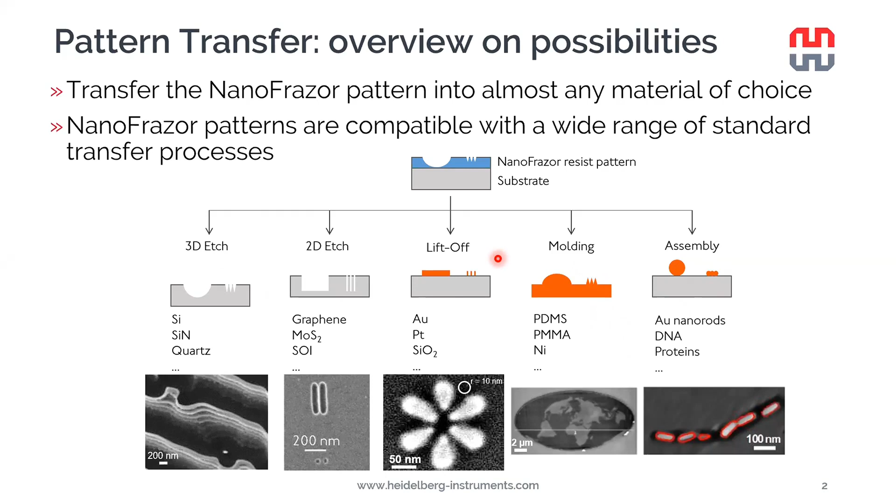Also, it is possible to mold, make replicas out of the resist structures, for example, for nano imprint mastering applications. Also, this will be covered in a separate webinar. Also, it's possible to assemble nanorods, nanowires, and so on by using templates patterned into the resist. But today's topic, as already mentioned, is lift-off, which is maybe the most commonly employed nanofabrication pattern transfer process.

So just looking into Wikipedia, we find the lift-off process definition. Basically you can pattern a photoresist using any lithography technology you desire. The only requirement is that there should be a hole created in the resist where the bottom is exposed to the substrate where you want your final pattern to be, and there should be some resist left elsewhere. And so that when you deposit the metal, most of the metal typically remains on top of the resist, and the parts you want to stay are deposited onto the substrate.

Then when you put your sample into the solvent or chemical, the resist together with the excess metal will be removed during the process, and you will be left with only the structures that you wish to remain, that were deposited in the hole in the resist. The key here is that you have an access point or several access points for the solvent to enter to the interface between the continuous metal film on top and at bottom to actually dissolve the resist.

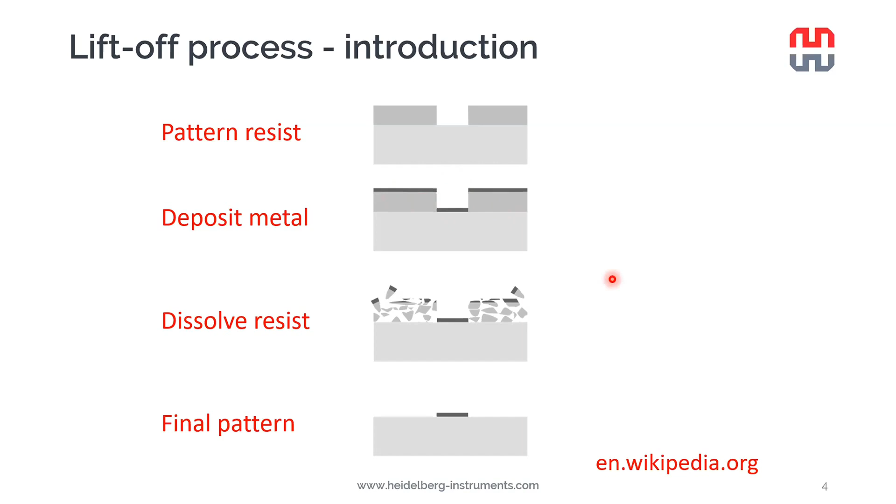Now we have a small problem with the NanoFrazor because we are using these ultra sharp heated tips for removing polymers from the samples, and we would end up, as we can see in this illustration, with sloped sidewalls. And if we would deposit metal everywhere on the sample, we would have a continuous film of metal, and the solvent could not remove the PPA from underneath. We would be just left with the original structure like that in the final sample.

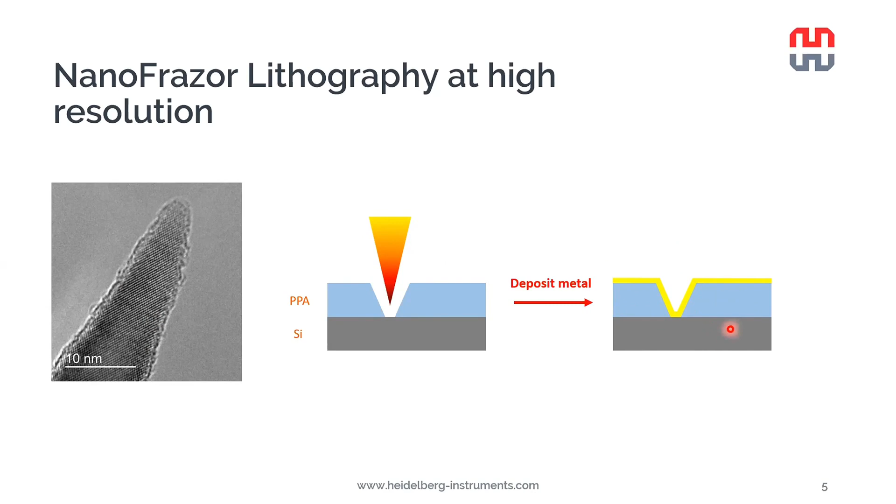Now, to overcome this problem, we introduced an additional resist layer underneath the PPA. It's called the lift-off resist, or LOR for short, on top of which then we deposit the PPA, typically around 30 nanometers in thickness. However, there are exceptions to this. Then after patterning our desired geometry in the PPA, we carry out a wet etching step, which is typically a base, typical developer, or a solvent that is isotropically developing the lift-off resist underneath the patterned holes.

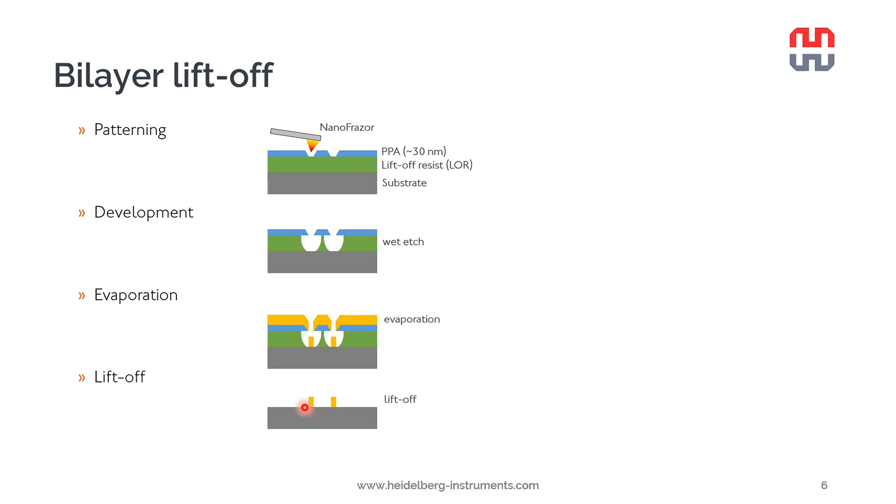So we have a nice undercut developing in the lift-off resist, which then helps us to get this discontinuous film after the evaporation. As you can see here, the metal on top and at the bottom are not connected. And when we put the sample in a solvent, the lift-off resist, PPA, and the excess metal are removed, and we are only left with the metal where we want it to be.

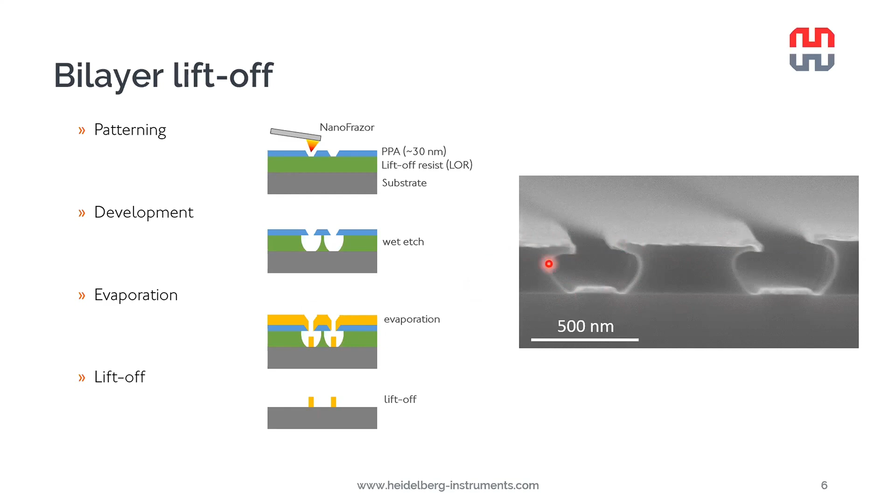In this SEM image, we see a cross-section of a bilayer lift-off sample just after the evaporation of the metal, and here we can indeed see that the metal is discontinuous between the bottom and top of the resist. We also see the freestanding PPA film and a nice undercut that has been formed in the lift-off resist. Now, this kind of bilayer lift-off process can be applied to virtually any patterns you wish to transfer on your sample. It's particularly useful, for example, for creating ohmic contacts to 2D materials, talking about electrodes or straight electrodes, for example.

What was done in this paper from Zheng last year was they used a layer of 200 nanometers of PMGI. PMGI is our typical lift-off resist of choice, coated with 20 nanometers of PPA, and underneath one layer of MoS2 grown by chemical vapor deposition.

After that, the sample was imaged using the NanoFrazor tip, and the flakes were still very nicely visible through the entire stack of resists. And they could carry out a nice overlay of electrodes, and they removed the resist at desired locations. And the PMGI was developed with a diluted TMAH at 1 nanometer per second develop rate. Low develop rate is important so that we can control the undercut accurately.

It's worth mentioning that during this process, the tip apex temperature is reaching only about 120 degrees Celsius, which is enough to decompose the PPA. And we estimate the temperature rise at the sample surface to be well below 10 degrees Celsius. So it's a very gentle process for sample fabrication.

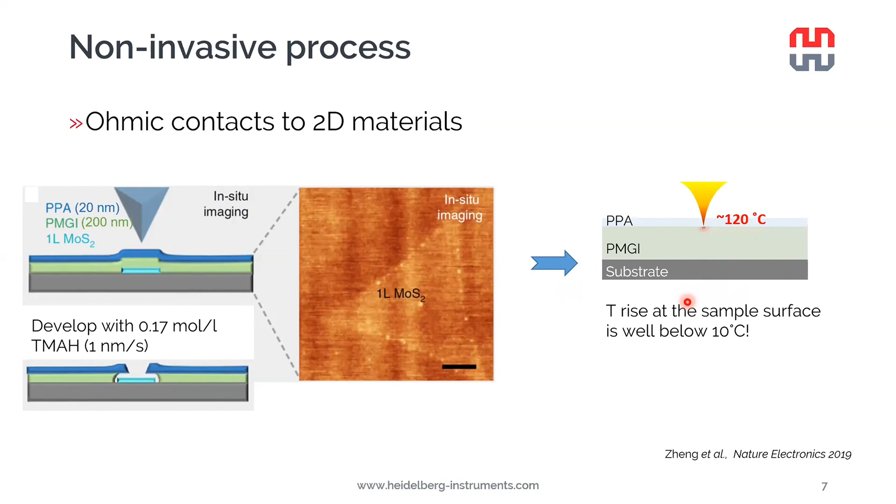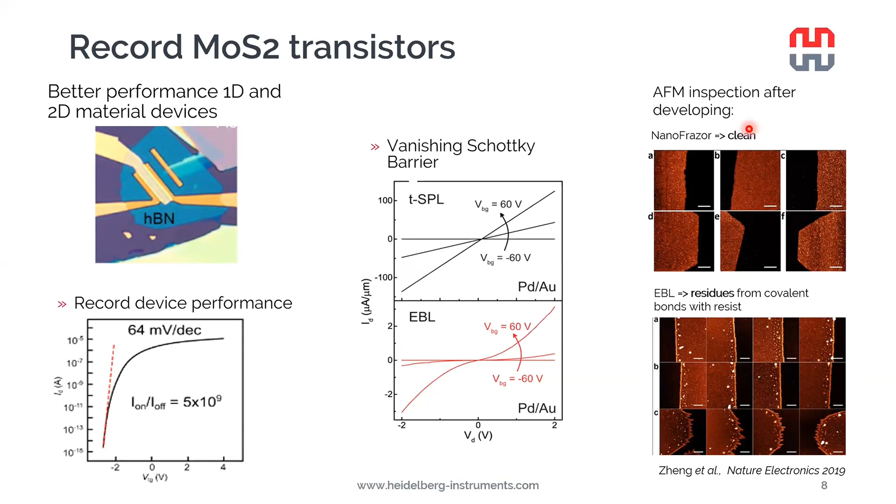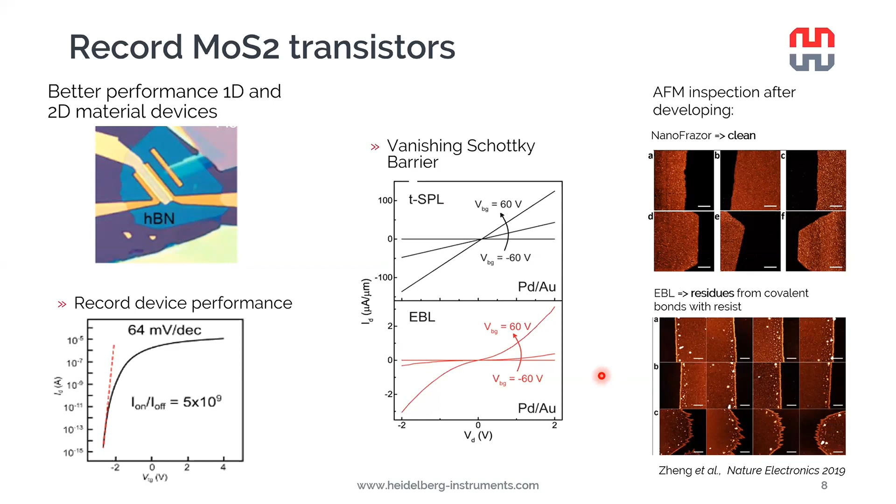One possible explanation why the devices perform so nicely could be that when we carry out AFM inspection of the MoS2 just after developing, so just before the metal deposition, the NanoFrazor samples are pristinely clean, so we don't see any modification of the material, while for the electron beam lithography patterned sample, we see residues from the electron beam resist. It has, as we say, burned on the sample. We also see roughening of edges, which is quite clear damage, which we attribute to the electron beam lithography process.

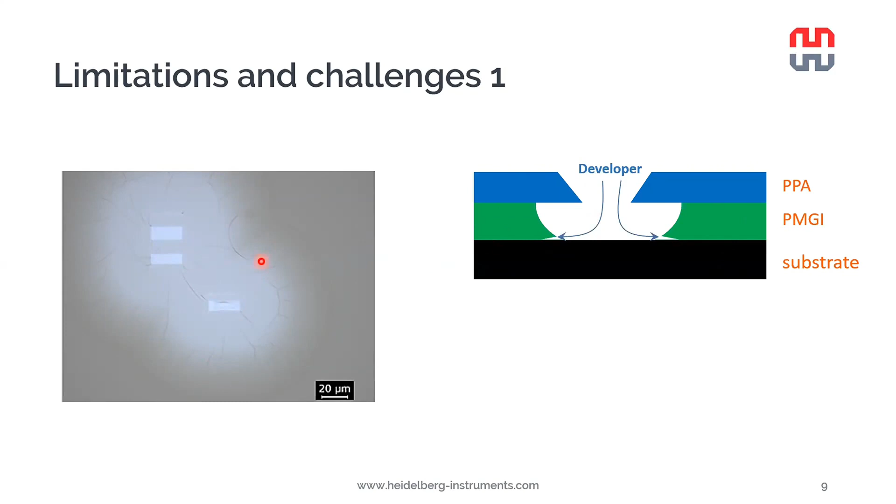So what can be the limitations and challenges when we carry out a bilayer lift-off? First of all, when we were starting to develop this process, we quite often observed this kind of halo image around our structures. Here we want to transfer these bright squares into the metal. What this turned out to be is that the developer is water-based, while PMGI is a quite strongly hydrophobic material, and the substrate was untreated silicon, so the native oxide was hydrophilic. And as a matter of fact, the developer wanted to penetrate between the PMGI and the substrate and push away to lift off the resist material. This is what we can see here.

The solution to this is quite simple. You just have to make the substrate hydrophobic to start with by treating it with HMDS before you spin coat the PMGI layer.

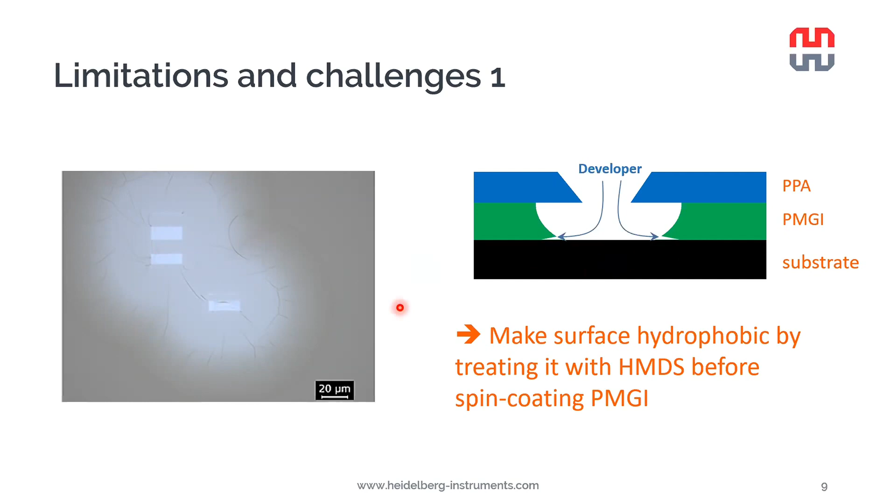The other limitation is that the maximum deposited metal thickness, we found experimentally, to be about 40% of the lift-off resist thickness. This is due to the fact that the metal tends to slowly creep from over the edges of the PPA towards the bottom. It ends up encapsulating the entire patterns, and the solvent cannot anymore enter to remove the lift-off resist.

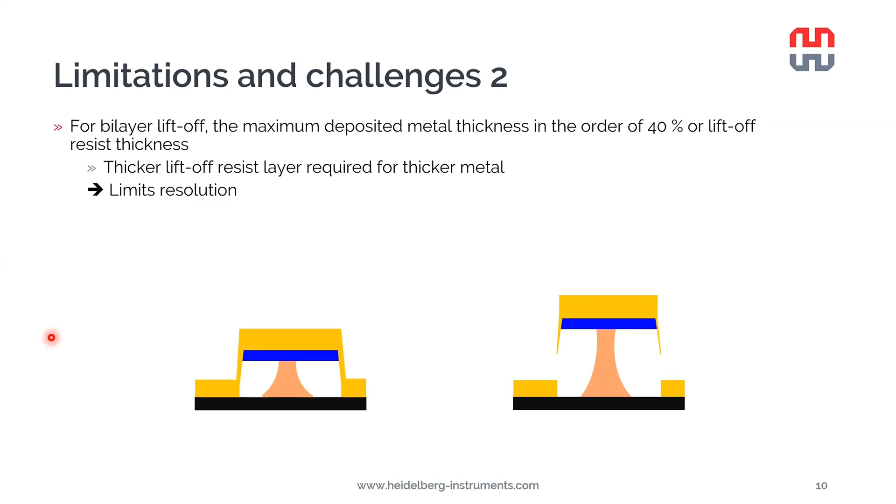The solution is again simple: just use a thicker lift-off resist layer, and we can continue with thicker metal. But actually, as it turns out, this approach of making the LOR thicker limits the resolution as well, as I explain on the next slide. This is due to the fact that the isotropic development is actually determining the minimum distance between the openings in the PPA, and this is approximately 2 times the thickness of the LOR layer. It's explained best by this simple animation here.

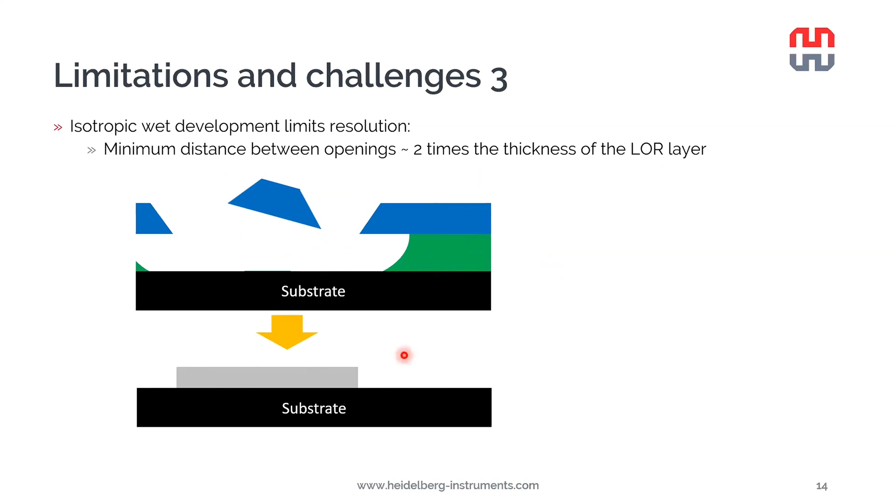As you can see, as we bring the openings in the PPA closer to each other, eventually the undercuts reach each other, and the PPA on top becomes freestanding, and it will fly away in the developer. And we end up having just a continuous field of metal instead of our line and space pattern.

We pushed this technique a little bit, and we managed to pattern a 70 nanometer resolution line and space array by using 35 nanometers of PMGI, 20 nanometers of PPA and a 16 nanometer metal layer thickness. It might be possible to push it a little bit more, making the PMGI a little bit thinner still, but the metal then would not be very conductive anymore. And actually, we have another process for high resolution lift-off, which I will explain in a moment.

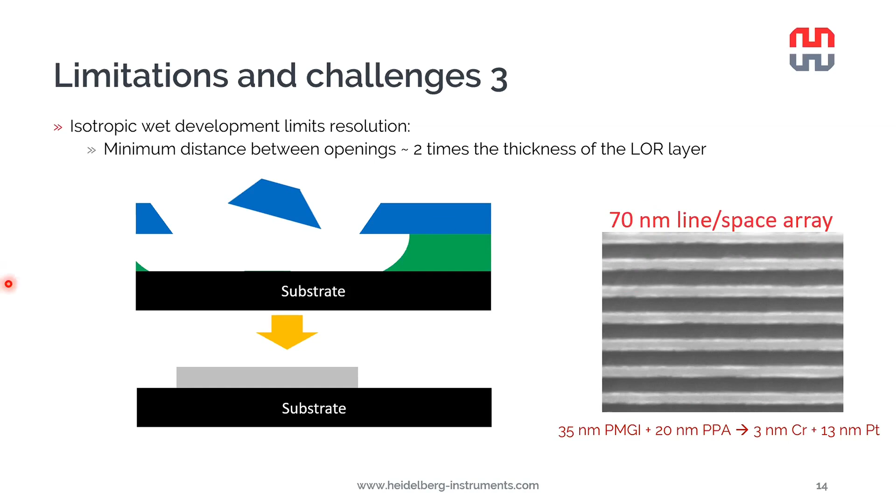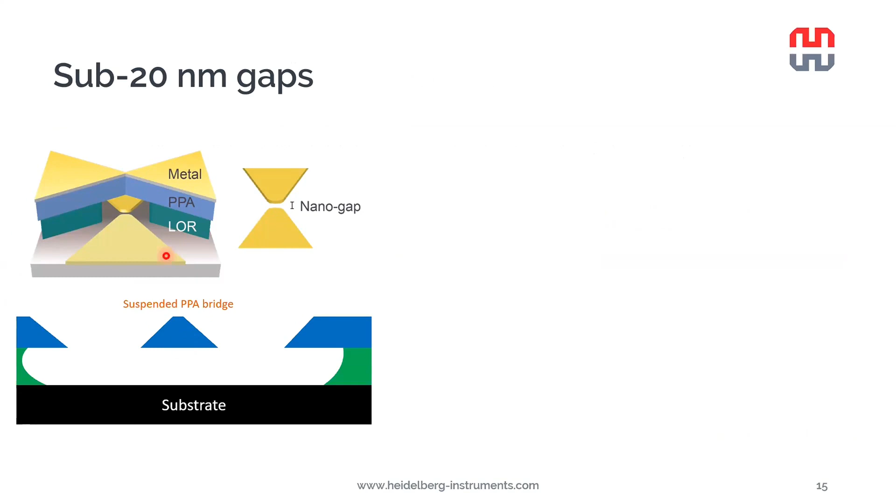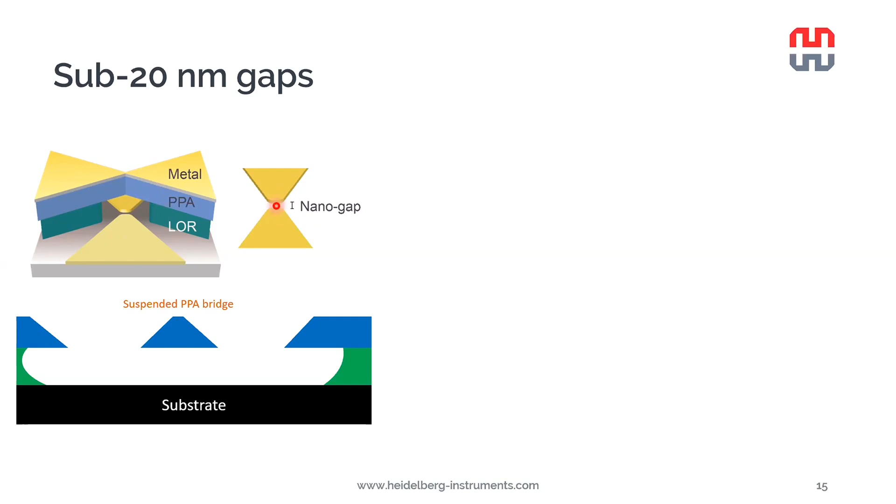But actually, such freestanding bridges can also be taken advantage of for certain device architectures. Namely, the suspended PPA bridge, if it's made short enough, can support its own weight, and it can be used as a shadow mask for evaporation, as explained here. Here the PPA bridge is supported by the LOR islands on both sides. The undercut has completely removed the LOR in the middle, and what we are left with is this kind of a nano gap structure, which is defined by the PPA bridge.

Using this approach, we have managed to pattern less than 20 nanometer nano gaps between metal electrodes. Very useful structures for, for example, plasmonics devices.

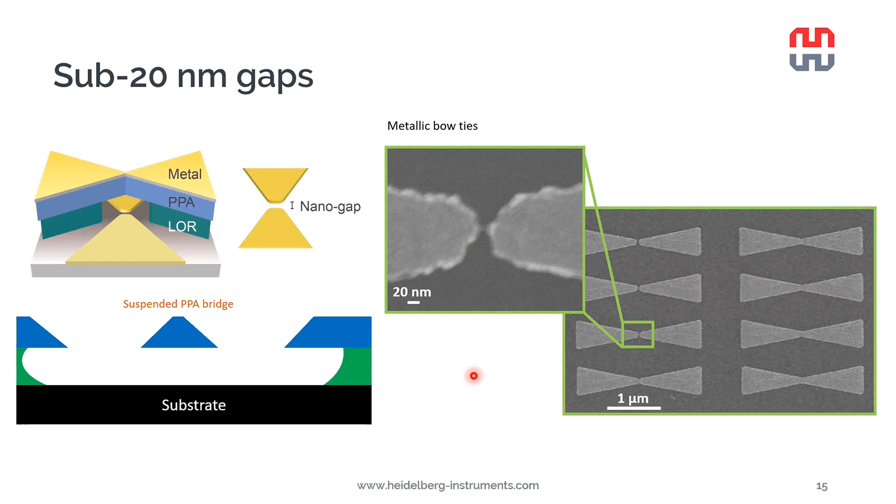And another process that takes advantage of freestanding bridges is the so-called Dolan bridge process that is very widely employed in fabrication of Josephson junctions for quantum computing applications, for example. Here we again start by defining a freestanding bridge. And the trick here is that we carry out evaporation with an angle. So we apply a tilt into the substrate during the evaporation of metal, and in this way we can evaporate metal underneath the suspended bridge.

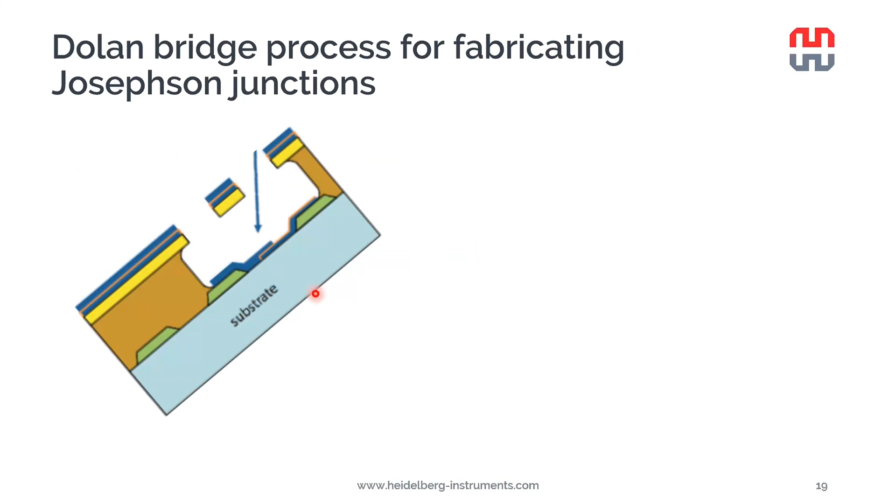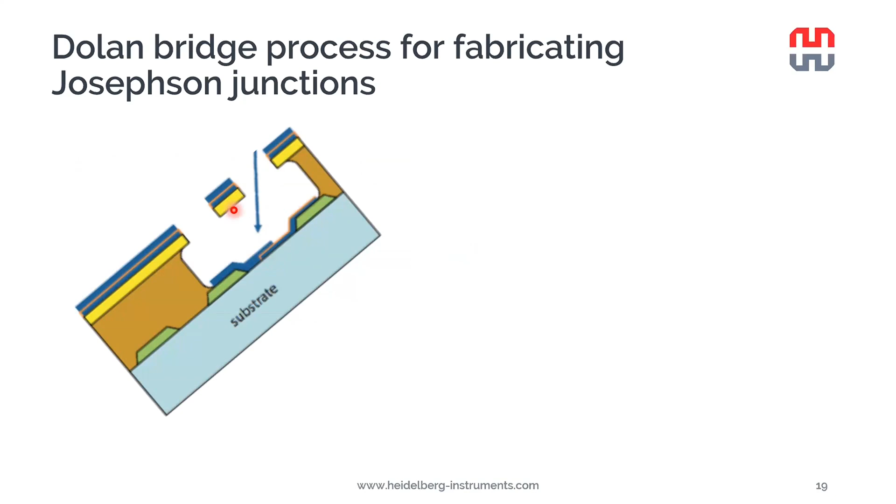If the metal we evaporated is aluminium, for example, we just vent the evaporator, and a very thin and very high quality oxide is formed over the aluminium electrode. We can continue the process by tilting the sample to another direction, and in this case we can make a connection with the already evaporated metal electrode underneath the suspended bridge. The nice thing here is that the overlap can be very definedly tuned by adjusting the tilting angle. So we can fabricate using the same geometry different kinds of Josephson junctions with different overlaps.

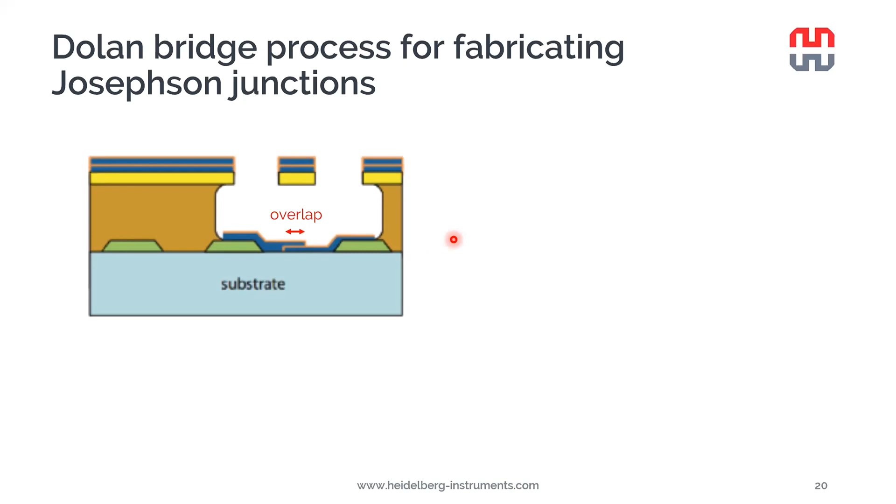So we have also done this using the NanoFrazor. The structure I showed before was mainly E-beam lithography based. But the main difference with the NanoFrazor is just the choice of materials, of course, that we use. PPA on top, a little bit thicker this time, 100 nanometers, just to make sure our suspended bridge is stable mechanically. As a lift-off resist, we used a material called LOR5B. It's basically PMGI, but it develops a bit faster. And all this on a sapphire substrate. The LOR can also be developed using a TMAH, the AZ400K developer.

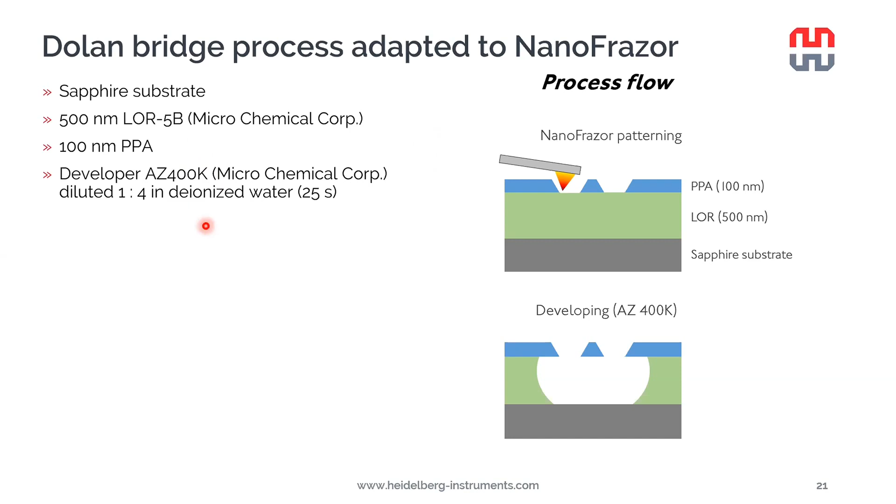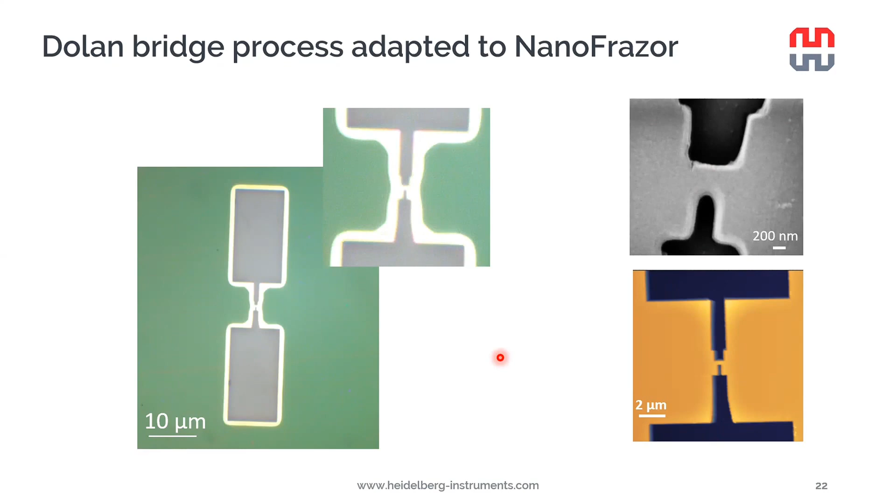In the optical image here on the left, we can immediately verify just by eye that we have created a freestanding PPA bridge here. The undercut is nicely visible as the bright rim around our patterns. And we also verified the dimensions and the condition of the bridge by SEM and AFM shown here on the right. Again, the major benefit compared to electron beam lithography is that you don't expose your sample to bombardment of electrons or other charged particles, which might trap there and then cause lots of problems when you are measuring your sensitive Josephson junction.

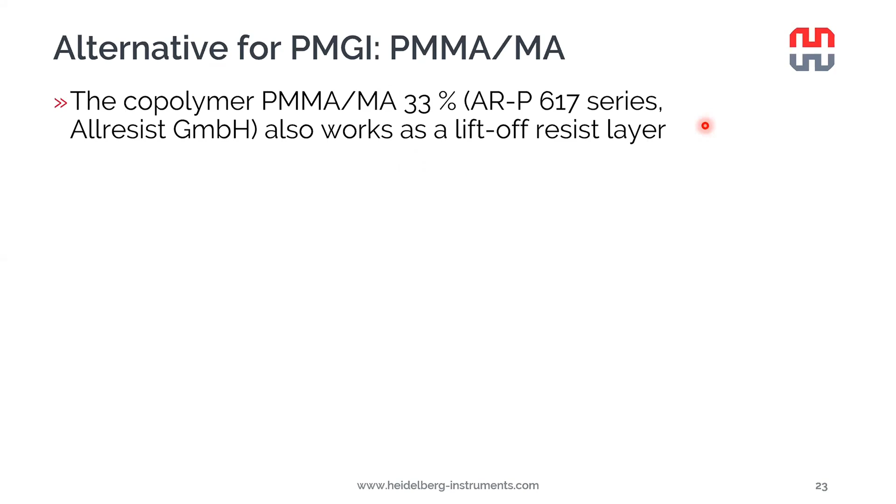So far I only spoke about PMGI, but there is also an alternative lift-off resist material, the PMMA copolymer. The MA stands for methacrylic acid. This material has 33% of methacrylic acid. It turns out it can also be used as a lift-off resist. It also gives us a nice undercut when it's developed.

But why did we look into this material in the first place? Well, we have quite some requests from our customers who would like to carry out the entire device fabrication process in a completely humidity-free or water-free environment. Basically, a glove box, which we have developed, a custom-made glove box with M. Braun. And we need the PMMA MA for carrying out a completely water-free lift-off process. So it turns out that it can be developed with pure ethanol at a rate of 1.8 nanometers per second. It's actually just by chance perfectly suitable for our thicknesses of materials we are dealing with here.

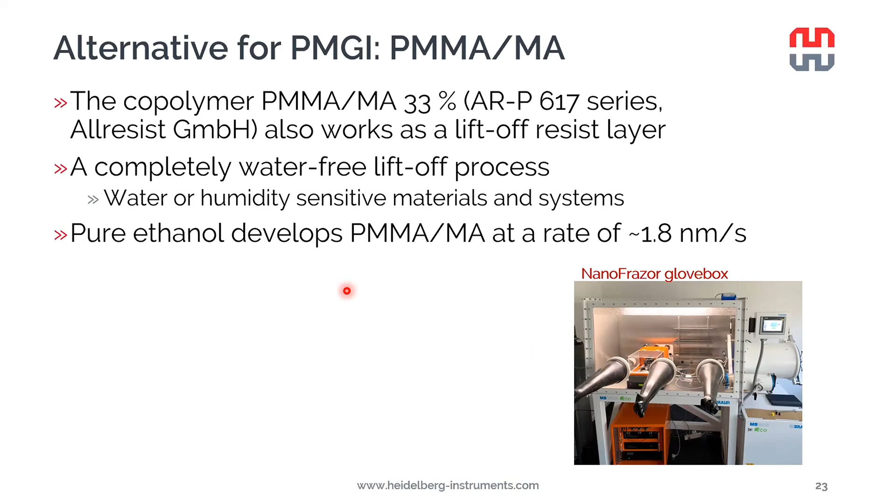So in the glove box environment, one can carry out the entire sample spin coating and patterning, then developing, and the metallization and lift-off process completely in a water-free process. Interestingly enough, I also managed to achieve the smallest ever nano gap between metal electrodes using ethanol developing and PMMA MA. It might be a coincidence, or it might be a property of the material, I don't know. But anyway, this is done using the freestanding PPA bridge process that I showed before.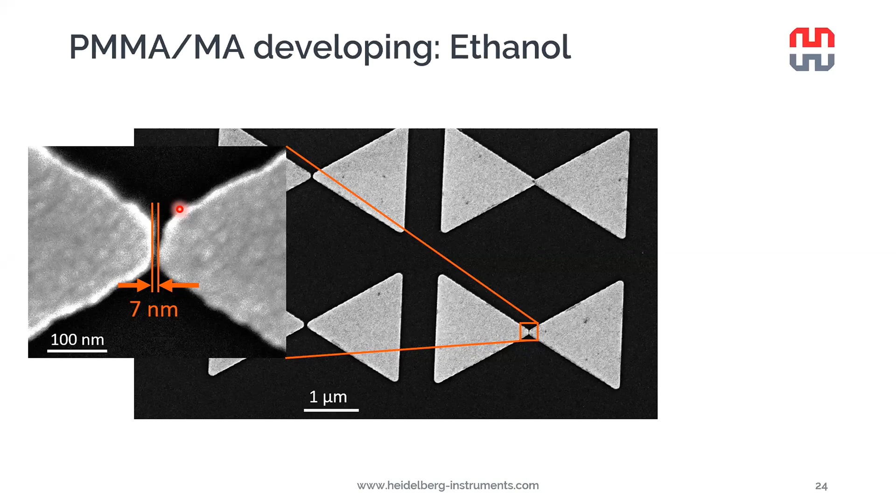Very quickly, a comparison of the properties of these two different materials. They have some small but important differences. So as I already mentioned, for PMGI it would be better to use a hydrophobic substrate. So ideally HMDS priming is recommended. While the PMMA MA likes to stick on hydrophilic substrates, so ideally oxygen plasma. But if your sample has sensitive materials, typically just native oxide on silicon is hydrophilic, and we don't have big issues with adhesion of PMMA MA.

Developer for PMGI is a base, a water solution, while for the PMMA MA we can use either ethanol in the water-free process, or a mixture of IPA and DI water also works very nicely. For both of these materials, we recommend DMSO, dimethyl sulfoxide, as the remover for the lift-off process.

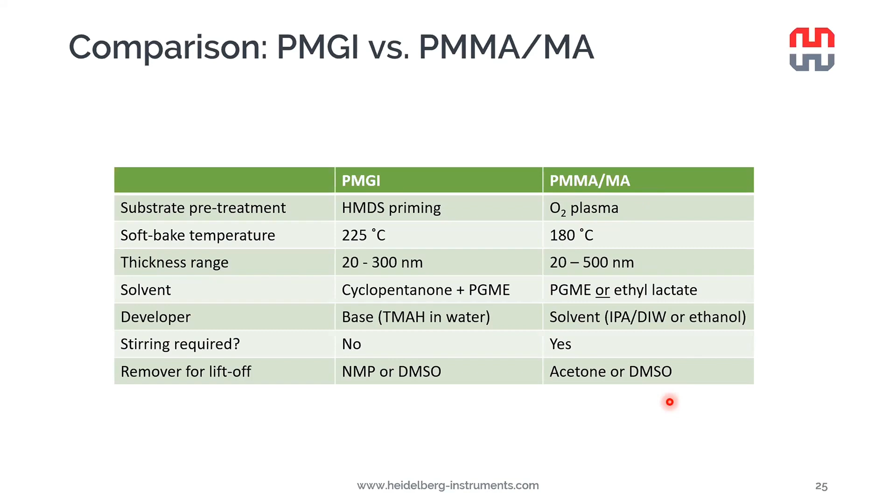I also want to mention quickly, as I referred before, we also have a process for transferring patterns that are less than 70 nanometers. And we call it, very originally, the high resolution lift-off process. Here, instead of 2 layers, we actually have 3 layers. So we have PMMA as the lift-off resist layer. On top of that, we spin coat a very thin layer of silicon hard mask.

So we developed together with the company PiBond a material we call SH113. It's basically a spin coatable siloxane polymer that is reduced into a silicon dioxide when it's exposed to a gentle oxygen plasma, and it forms an extremely thin layer of silicon oxide, which is pinhole free and extremely smooth, only 1.5 nanometers thick. And on top of that, we spin coat PPA, about 10 nanometers typically.

We want to make it as thin as possible so that we can also pattern using the maximum resolution enabled by the sharp tips. After the patterning, we first etch the patterns from the PPA into the silicon dioxide in a reactive ion etching step. Afterwards, we transfer the pattern further into the PMMA below using oxygen plasma in a reactive ion etcher. The silicon dioxide is, as I mentioned, a very high quality oxide, so it can withstand etching of even hundreds of nanometers of PMMA if required.

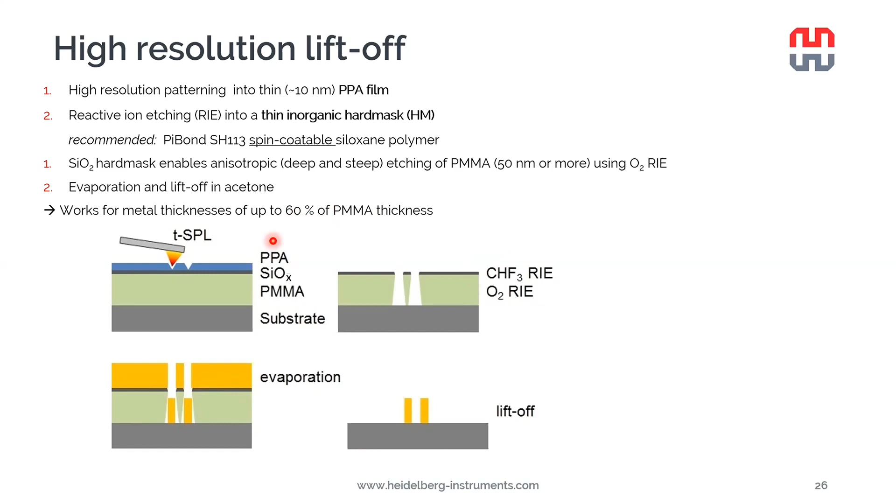In this case, the undercut that develops is much smaller than in the case of the bilayer liftoff. And we can actually evaporate up to 60% of the PMMA thickness in metal, and then carry out a liftoff by dissolving the PMMA in acetone. Here's an example structure, just a 6-fold bow tie antenna, where the tips have a radius of about 5 nanometers, and the gap between each of the leaves is less than 20 nanometers. This was a lift-off in gold.

So actually for this process, the key feature is its very high resolution. It's a much higher resolution than the bilayer lift-off process due to the lower undercut. And also the feature density we can achieve is very much higher. However, it requires dry etching. And actually the dry etching is handled in more detail in another webinar in this series. So stay tuned for that.

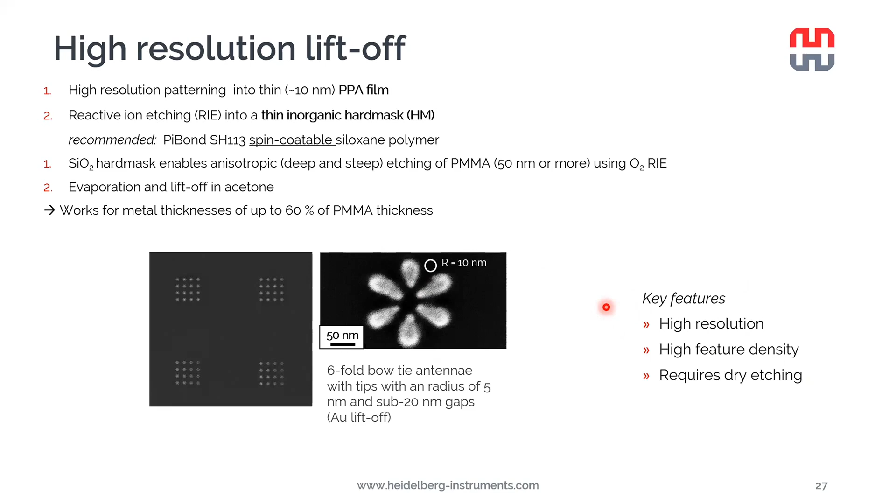The limitation of the high resolution liftoff is the pattern collapse. As you can imagine, if you have a very thick PMMA film and a very high resolution pattern, then the aspect ratio of your structures, that is the height divided by the width of them, becomes higher, and the tendency to pattern collapse is directly proportional to the square of the aspect ratio. Here we can see in these images where the aspect ratio is slowly increasing, and we can also see the amount of pattern collapse becoming more and more dominant. And from the top, the structure looks like this, and this is not very useful anymore for the liftoff.

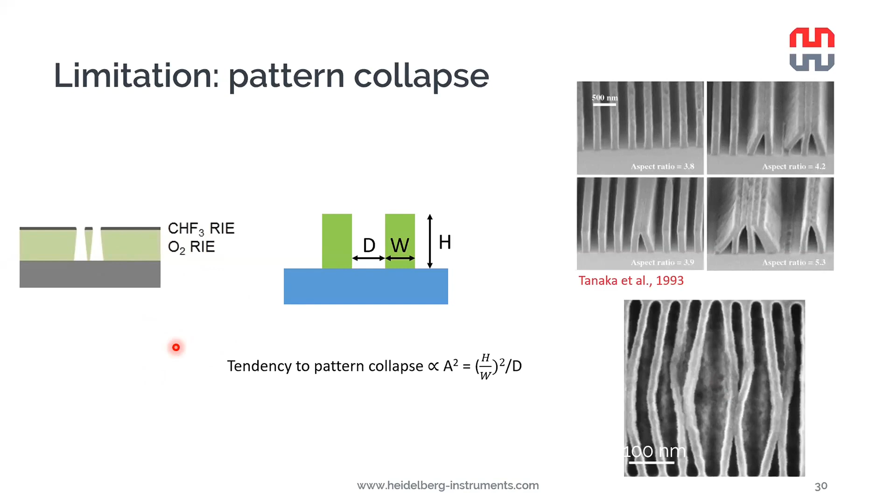So the lesson learned here is that if you want to make very high resolution metal lines, you should make them very thin. And in other words, if you want very thick metal lines, then don't use a very high resolution, of course. Okay, in conclusion, I showed that the liftoff processes are compatible with the NanoFrazor patterning.

So we have these two processes, the bilayer liftoff. It's a very straightforward, quick, easy to use process. It's also very gentle. It enables making contacts with minimum invasiveness to your sensitive material. And as a bonus, it can also be made completely water-free in a glove box environment.

I also showed that if the resolution of the bilayer liftoff is not enough for some application, there's also the higher resolution liftoff, where we use a 3-layer pattern transfer stack that can be entirely spin coated. We can reach very high resolution, but it does require reactive ion etching, so it's a little bit more complicated. But if you refer to the NanoFrazor process handbook, which will be an additional feature in the latest software version, which will come out soon, it will contain much more detail than I have shown here about the processes and also all the materials involved.